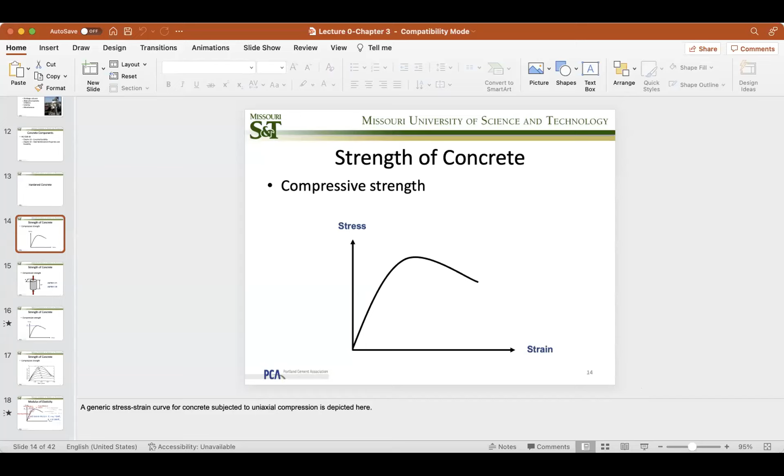Okay, now what we also learned, shoot, this is not open yet, sorry. What we learned from the concrete properties last time, 1 second, this thing is warming up, is that concrete has paste and aggregates. We know also what kind of test method we use to get compressive strength out of it. What do we use? Hydraulic, sure. But what kind of test samples? Cylinders, right? So which are the 2 cylinder sizes we use? 6x12, right? And 4x8.

Sorry, I don't like this stuff. Okay, so there we go. That's what we learned, okay? And we also said something about the modulus of elasticity, right? Modulus of elasticity. So I need to share screen apparently so we can get it recorded. So let me do that as well. There we go.

We have a nice nonlinear curve in terms of stress and strain. The definition of stress is pound per square inch, and the definition of strain is elongation over original length. So what is the unit for strain? No unit, right? So 1 is the unit. Now the modulus of elasticity, or Young's modulus, for concrete is defined as the slope of this linear curve, equal to stress divided by strain. Given that the unit for stress is PSI, what is your unit for the modulus of elasticity? PSI. All right, good. That's what we learned.

All right, so next stuff. We now know we have to test the concrete cylinders. And there are standards, right? 25 tamps per layer, 3 layers for 6x12. Similar things go for 4x8, might be a little bit different, but that's how we prepare cylinders. We prepare cylinders according to ASTM standards C31 and C39. If you have doubts and worries, go to those and find out the details.

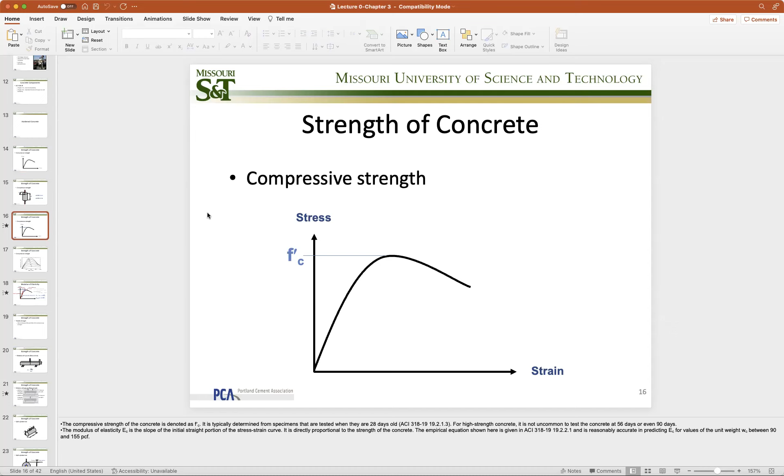Now, next step, compressive strength of concrete. We call the peak stress of the stress-strain curve f'c the compressive strength of the concrete. And everything, meaning the modulus of elasticity and the tensile strength, is related to this f'c. So all we need to do is get f'c and estimate the other properties for concrete.

Okay, you need to know this. As concrete strength goes up, the stress-strain relationship of the concrete changes. You see this curve was originally flat, now becomes a little bit sharp, meaning the strength increases, but the failure strain or ductility reduces.

This is the nature of law for materials. Any material that is high strength is usually brittle. Any material that is low strength is usually tough and ductile. Give me an example: concrete is high strength, brittle. What's the other material that is low strength but ductile? Rubber, right? Tires on your cars. That's the example. So similarly for concrete, the higher strength you go, the more brittle it is.

So what does this imply in terms of design? If I have high strength concrete compared to low strength concrete, what do I need to do to ensure it is safe? Increase ductility. What should I do? Add steel reinforcement.

Got it? So for UHPC, what is UHPC? Ultra high strength concrete, right? You've seen that a lot for building structures and bridges out there. Why do we use UHPC anyway? Why do we need high strength concrete? To reduce the section size so we can build slender structures.

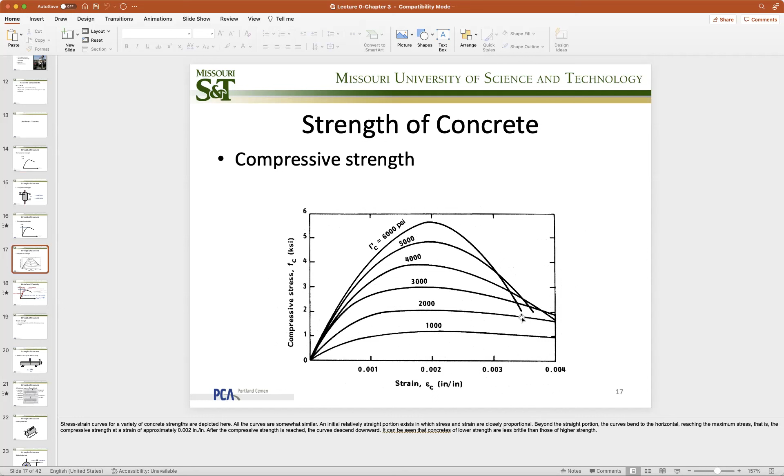But the sacrifice is what? We need to add a lot of steel. Okay, so that's the original concept coming from this curve. And now we have a lot of delicate parts of this thing, like the initial tangent modulus and B and A, all that crazy stuff. I will talk about it in terms of writing right after the slide. So for now, this is just for sightseeing purposes.

One thing you take away right now is EC here in terms of modulus of elasticity or Young's modulus. Young is a guy who discovered this thing, way ahead of Hooke. That is EC equal to 57,000 square root of F prime C.

Now F prime C is in terms of PSI. So what is the unit of square root of F prime C? Square root of PSI, isn't it? Wrong. This is an empirical equation, so there is no square root of PSI. You just take the number in terms of PSI but leave the unit out.

So modulus of elasticity shares the same unit as F prime C. Remember that. Now let me ask a question. I am on site, my guy told me the concrete is 4 KSI. What is my Young's modulus, my modulus of elasticity? Don't stare at me, do you want me to use Siri or pull out your calculator? Let's punch the numbers, pull out your calculators and do it.

57,000, and my concrete, F prime C, curbside concrete picked up from Rolla Ready Mix, is 4 KSI. What do I have for EC? Come on, you have the equation: 57,000 square root of F prime C. What do you have? I'm considering giving a bonus to whoever shouts out the correct answer first.

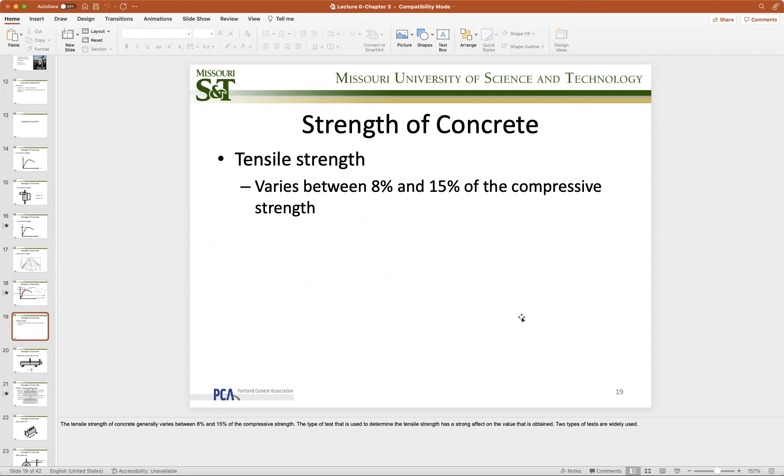Okay, so 6M over BH squared, and you get the tensile strength of the concrete. Let me ask you this again. The crack will start from the top or the crack will start from the bottom? Bottom. Why is that? Because that's where the tensile stress, tension, is at. Great, okay, that's it.

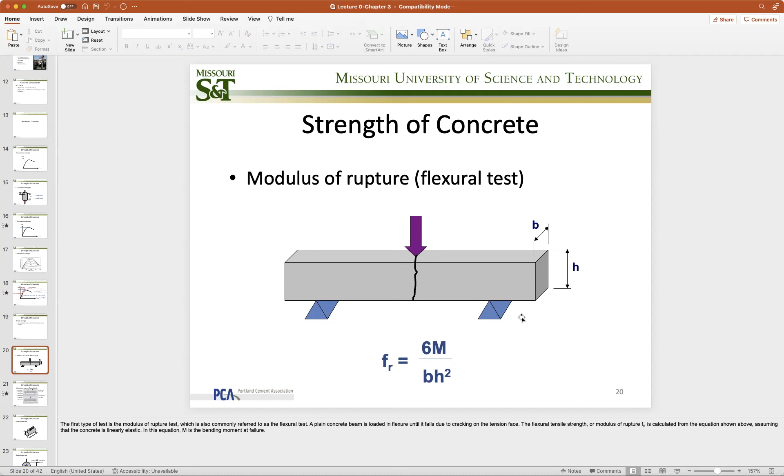So there are other ways. We also do 4-point load instead of 3-point load. And why we're doing 4-point load? Well, because the moment is different, right? So for the 3-point load, what does the moment diagram look like in your head? Hint, triangle or rectangle? Triangle, right? So that means I only have one spot that has a maximum moment, which is the middle of the beam. Is that right? Okay. For 4-point load, you will have a so-called constant moment zone. That means in the middle section, the entire zone has the same moment.

So answer me this. You do a test, one with 3-point load, one with 4-point load. Which one gives you a lower number? Let me ask you again, gentlemen, that is not on your phone. You have a 3-point load and a 4-point load, and you do 2 tests, same beam, identical. Now, which number is lower, from the 4-point test or the 3-point load test? Why? Because there's a higher moment in the middle... let's assume it's the same moment. That's a good answer, so my fault. Let's assume same moment though. It's more concentrated, so one part has to experience it.

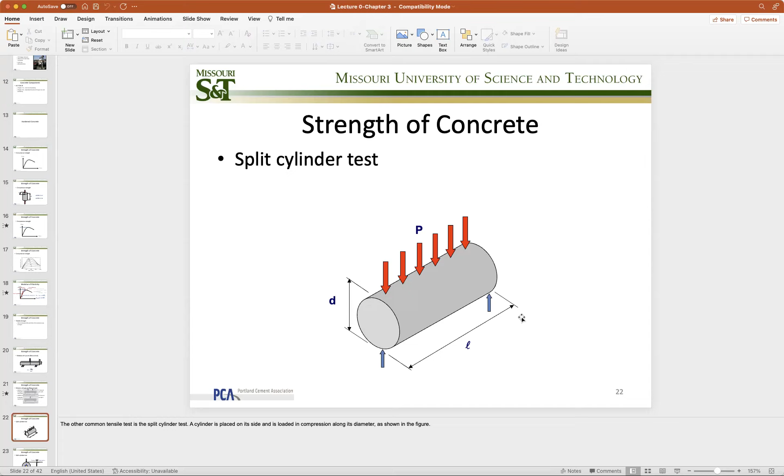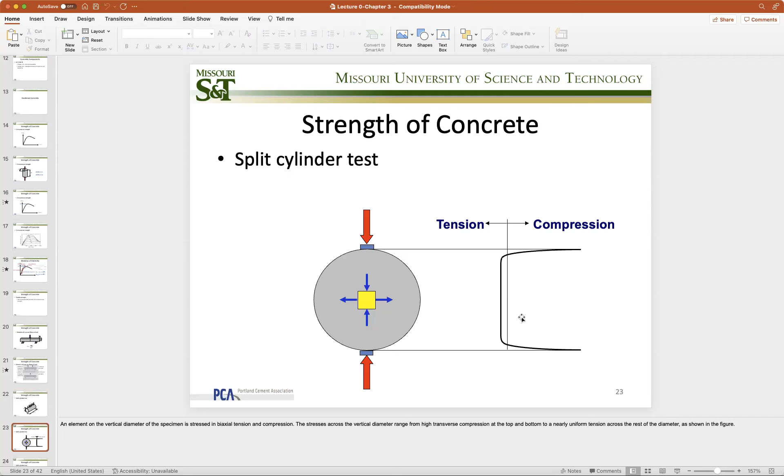It all depends on stress distribution. For split cylinder, you have a tensile zone, but you also have some compressive zone on the top. So the chance of failure is actually a little bit higher for the split cylinder, so split cylinder will give you a lower stress. That's what we learned.

Now compare the three tests before we go on, I want you to write some numbers down. For the beam, the obtained tensile strength is usually called modulus of rupture, MOR. Write it down. That number is represented by a symbol F with a subscript R, lowercase r.

And that equals 7.5 square root of F prime C, with F prime C taken as PSI. That's from the beam bending experiment. For split cylinder, usually it is 6.4 square root of F prime C, an empirical estimation.

So which number is lower for the same concrete strength? Split cylinder. Remember that, I will ask you that in the exam. But we usually don't use the split cylinder test results for design. We use 7.5 square root F prime C for design purposes, and that usually equals about 10% of concrete compressive strength.

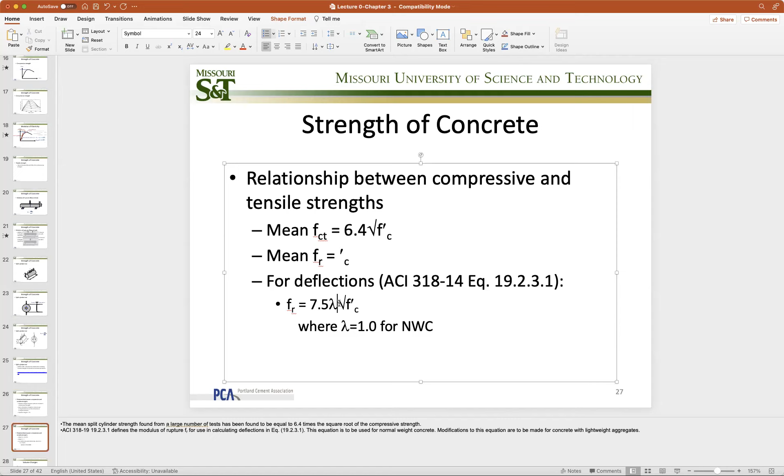All right, so that's the idea. Quickly, I want to get through this stuff. Concrete will change its volume. It will shrink, it will creep, and it will expand under temperature.

What is the shrinkage? What causes it to shrink? Well, it naturally likes to shrink. So what component has to be taken off to reduce its volume? What's in it? Water, right? Water is the only thing that evaporates and will shrink the concrete.

What kind of problem do you anticipate if shrinkage happens? Cracking. Why is that? Because when you reduce your volume but your boundary is still fixing it, you are generating what? Tensile stress inside your concrete, so you crack. Okay, so that's called autogenous cracking. Autogenous cracking. Okay, all right.

So creep. What does creep mean? Creep means if my wife is cooking, I don't want her to know because I don't want to do extra work. I follow her from the kitchen to wherever she's going, and she just didn't realize. That means you're creepy, Bob. But that's not the same creep we're talking about here.

Creep, by definition, is a permanent deformation caused by permanent load. That means if I become a Shaolin monk, apply my palm on my table, right? The Pai Mei palm. Watch Kill Bill. Not much? Oh boy, you guys lost out.

Anyway, so I apply 100 pounds of force, right? Apply it for a second, nothing will happen. I sit on it for 100 years, right? Oh, I'd be bones then, right? But after 100 years of load, you will see a palm shape in the table. That means creep. It's not much load, but it's permanent. Forever. Okay, so that is the same as footing foundation settlement.

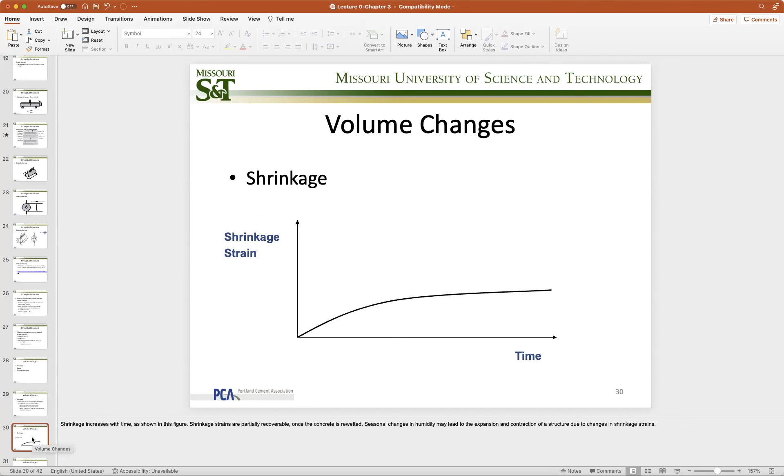Now, what does it mean? You guys taking the survey class, you take out equipment from somewhere down in the hall in the BCH, right? Next time when you take out equipment, look up, there's a giant crack there. And that is caused by creep. And don't tell the professor I said that, okay? It's supposed to be a secret.

All right, so that's what you need to know about concrete for design purposes. A lot of visuals, a lot of quick ideas. You need to remember all this for your exam, but I don't have to read it. I think you can comprehend and remember this, okay?

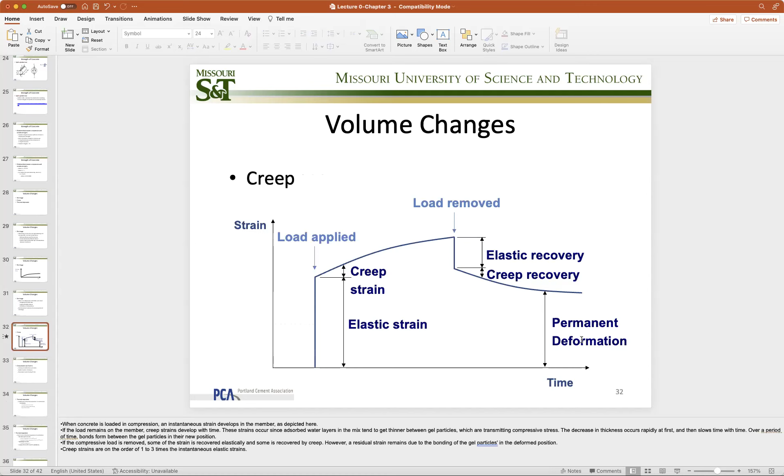Now, critical things, steel. For reinforcing steel, how many of you guys have worked with reinforcement before? One guy, two guys, okay. How many guys actually bend the stirrups yourself? No? Am I the only guy here who bends stirrups? All right, so I am the only guy. Okay, great. So you've seen the reinforcement, right?

Is it smooth? Is it smooth, shining like a mirror? No, right? It is usually what? Deformed, ribbed, right? What is that ribbing for? Surface area for what? For friction, for better bonding with the concrete. Interaction, friction, adhesion with the concrete.

So every reinforcement you see out there, unless it's wire mesh, is deformed. Hence, we call it rebar. That's the concept of it. So normal reinforcement we call deformed bar or rebar. We have welded wire reinforcement, usually for thin slabs and walls. We have prestressing steel, which we talk about in the prestressed concrete class, but this is for rebar. There are ASTM standards A615, A706.

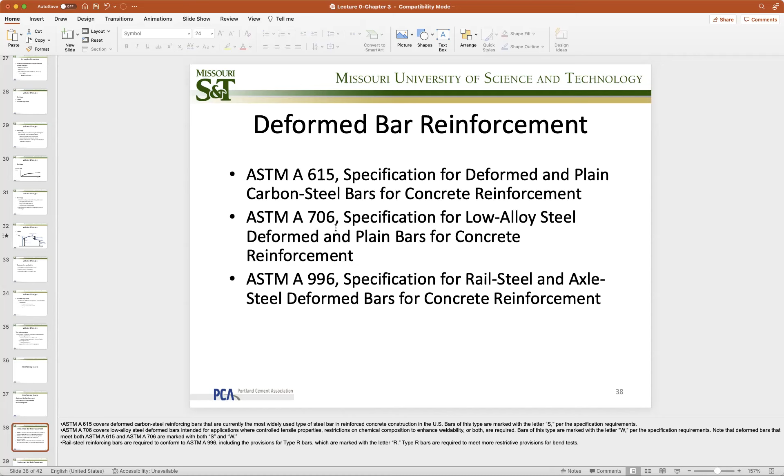Why is that? We have cold-formed structures, right? You will be taking lessons on cold-formed structures later in your life. Hopefully Dr. LaBoube is teaching it, I don't know whether he's still teaching that or not, but what is the difference between cold-drawn or cold-formed steel and hot rolled steel?

Temperature, sure, but in terms of mechanical properties, what are the differences? Ductility, and well, that's right. What else? So have you taken the materials lab before, tested steel before? No? Okay, so next time we do that, right?

You put a hot rolled steel and you put a cold formed steel, right? One behaves like a nice smooth line, which means no yielding point. That is cold formed. Hot rolled steel has a yielding point, and this is the yielding point I'm talking about. Why is that? Because hot rolled steel goes through a rapid annealing process. What is an annealing process? You bring it up to a very high temperature and quickly cool it down.

How many guys are into the forging TV shows on Netflix, Forged in Fire, something like that, right? There's always a critical step: anneal your knife, quench it, right? What is quenching? You bring it to a very high temperature, you quickly lower the temperature, where the grain in the steel crystallizes, becomes finer, so becomes stronger, right? So then you have the sharp point, it's called the yielding point.

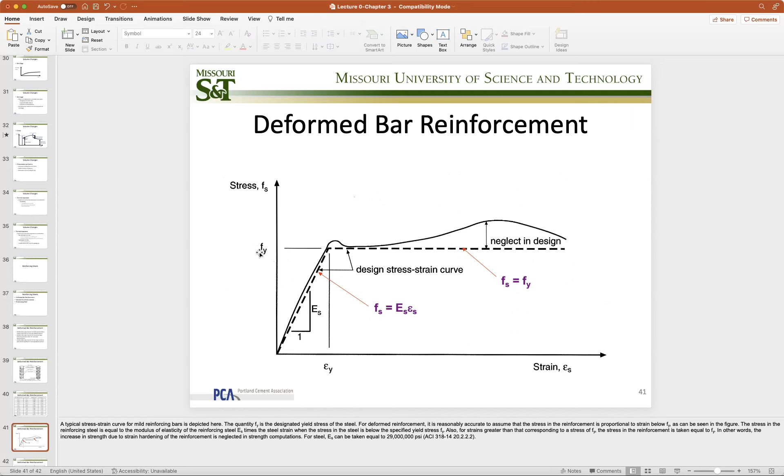Now, you hear them on the job site: Joe, what steel are you using? 40? 60? So they shout out 40, 60. What does it mean? It's grade, right? Grade 40, grade 60. 40 means 40 KSI for the yield strength fy. 60 means 60 KSI for the yield strength fy. Why is that so important? Because you need that number for your design.

Now, the structural steel you see in the lab or in buildings is usually 50. For stirrups, for shear, usually 40. For main reinforcement rebars in bridges and everything, usually 60. For the World Trade Center, high-rise buildings, usually they go with 75.

Okay, you want to sound like a pro, you need to know these numbers. All right, so that's it for these numbers. That is how much we need to know about steel. Is it the last slide? Almost the last slide. One more thing: bar size.

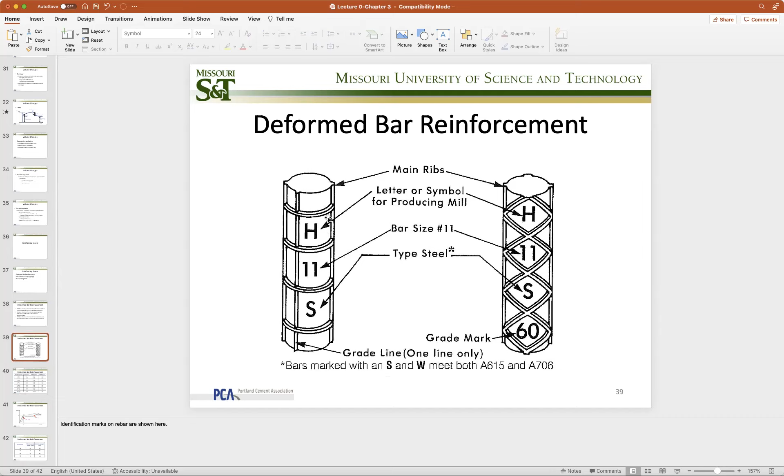You say, Bob, that's a lot of memory. My computer does that, not me. That's fine. There are critical numbers you need to remember. Number 3, mark them down, 0.11 inch squared. You will use this again, especially in the shear part, chapter 6 or 7. Number 3, 0.11. Number 4, 0.2 inch squared.

Then number 6, 0.44 inch squared. Number 8, 0.79 inch squared. And my personal favorite, number 9, 1 inch squared. Why is it my personal favorite? When I give you the exam, I need to put bars there. I'm lazy. I don't want to do fractions. So for four number 9 bars, how much total steel area do I have in the cross section? 4 inch squared. That's why it's my personal favorite. It will become your personal favorite as well because you do exams. Remember that.

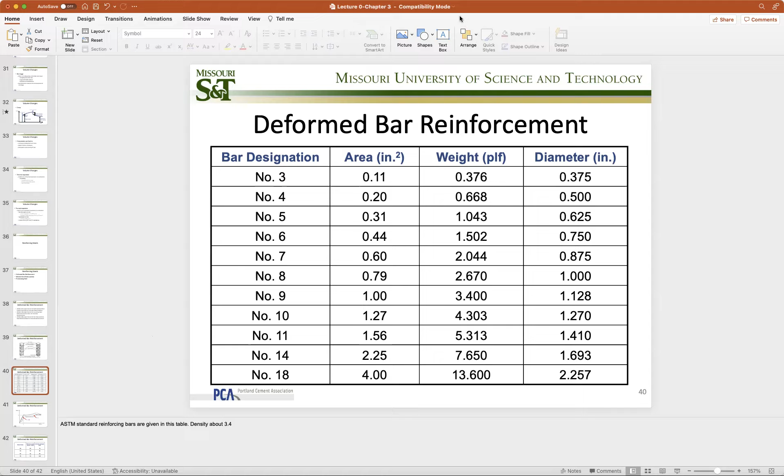All right, so that's about it. Now we flew through the concrete properties and steel properties in a jiffy. Should we go home now? No, I'm sorry. Hell starts now. Let's get into the mathematical side of it, which is my true favorite. Let's take a look at the equations and all the beautiful things that we will have.

Let me share my screen. This can be a little bit time consuming since I'm juggling three technologies at the same time. For old me, this is really hard, so have a little patience. Trying to make it large. If it's too small, just shout and I'll make it bigger. So open up this slide here.

Like I said, hell starts from now. Lecture 1, basic properties for design. Please pull out your notepads, iPads, Surface Pro, whatever you have. Let's start. Basic properties for design.

Okay, all right. So we talk about concrete properties, right? So let's say compressive strength of concrete, okay? We have talked about it. And that's a lot of information, right? So you will need to know these following for the exam, okay? So first thing, F prime C is the compressive strength of the concrete, but that is a 28-day strength using this fellow here, cylinder compressive test, okay? The term is uniaxial compressive test. Okay, uniaxial compressive test.

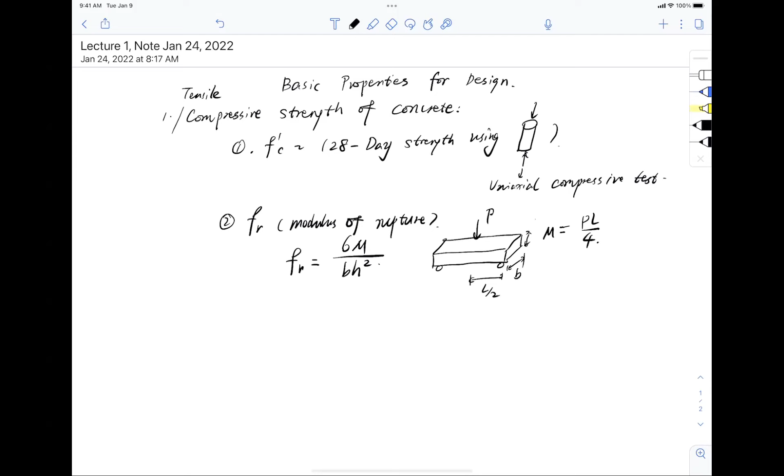Okay, good. So that is for the compressive strength. Now, let me just add this one, compressive, tensile. Sorry about that, tensile or compressive. Okay, another thing, FR, we call it modulus of rupture, right? Modulus of rupture. And that is FR equals 6M over BH squared. In your head, it should be a small, tiny beam here. And you can draw that on your crib sheet, supported at 2 ends, with a force there at half L. So M equals PL over 4, okay? And then B is the width of the section. H is the height of the section. Should not make mistakes. That's how you calculate the strength from the test.

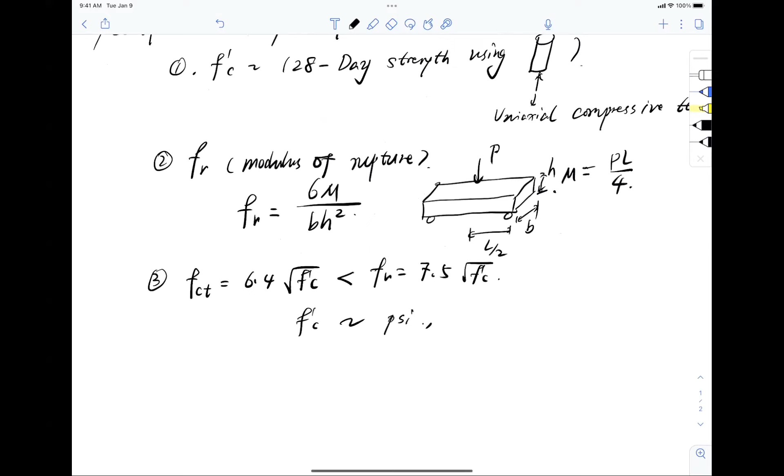Now, the third thing, FCR or FCT roughly equal to 6.4 square root F prime C, smaller than FR equal to 7.5 square root F prime C. And knowing that F prime C is in terms of PSI, okay? In terms of PSI, no KSI here. So you see, that's all you need to know for the exam, for concrete properties.

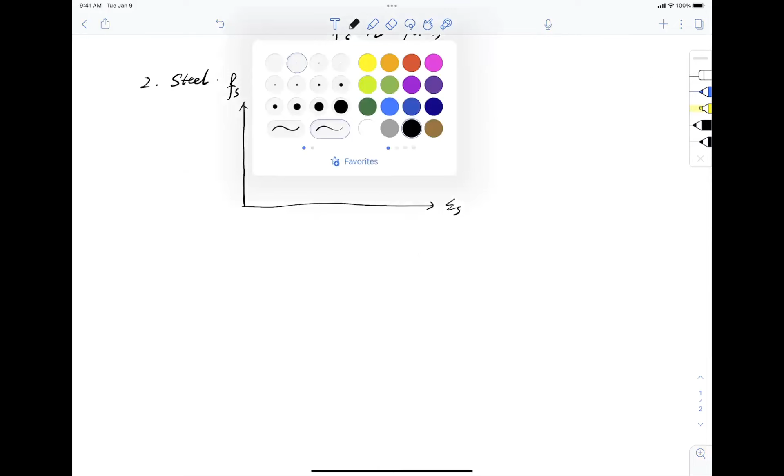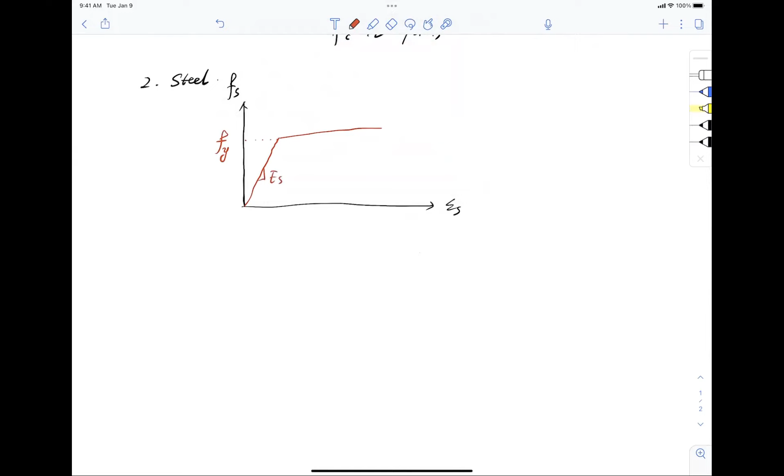Now steel, okay? For steel. In terms of steel, we call the stress in the steel Fs, and the strain in the steel epsilon S. And if I want to draw a curve, it goes like this, linear line, elastoplastic, the horizontal flattens out. And this value here, we call it Fy, Y representing yield, so-called yield strength. And this slope here is called modulus of elasticity for steel. And ladies and gentlemen, this number you will need to remember is 29,000 KSI. What is the modulus of elasticity for steel? 29,000 KSI, great.

Why do you need to remember this? Because in the exam, I will not be giving you that. You need to remember this. Why, Bob? Why make my life harder? It's not me, okay? It's the society, blame them, right? Because on the job site, nobody will give you a book. These numbers you need to remember. All right, so that is 29,000 KSI, great.

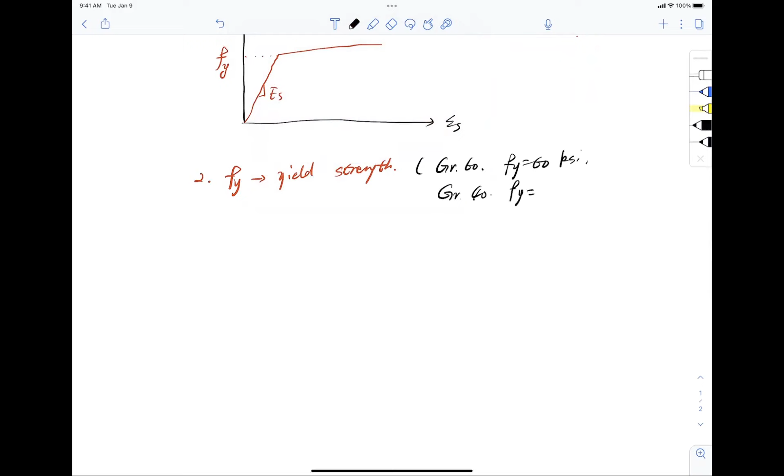We need to know Fy is so-called yield strength. And we also need to know that it depends on the grade. If it's grade 60, Fy equals 60 KSI. If it's grade 40, what is Fy, folks? Come on, 40 KSI. Again, I will not tell you in the exam what the yield strength for the steel is. I simply will say grade 40, grade 60, and go figure. Remember that. All right, so last thing, bar size. For a number 5 bar, what is the size of the bar, folks?

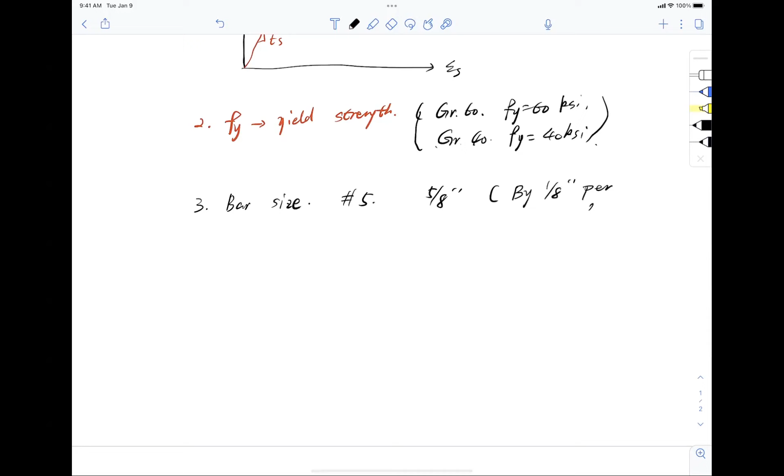5/8, right? So go by 1/8 of an inch per increment. Okay, need to know that. All right. And my personal favorite, number 9. That is 1 inch of bar diameter. What is the cross-sectional area of a number 9 bar?

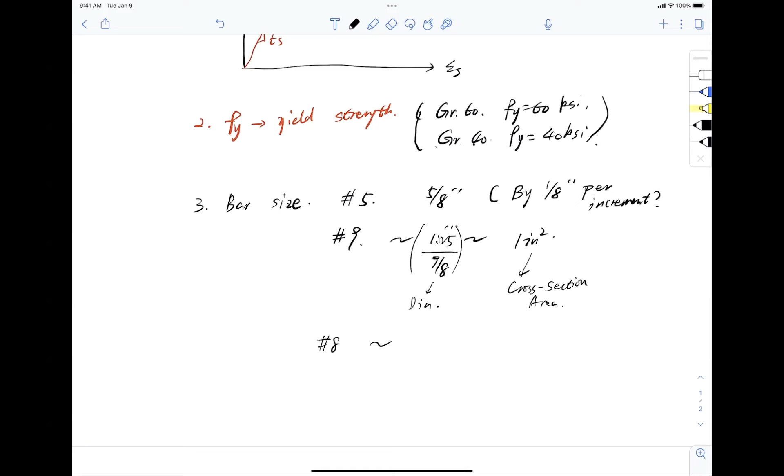Did I make a mistake here? You bet. Is that 1.125? Yeah, that is the diameter of number 9 bar, right? Because that is 9/8. And area is 1 inch squared. I made a mistake just now, and trust me, likely you'll make the same mistake, okay? Number 9 bar, the diameter is this, and this is the cross-sectional area. Don't get confused. So number 8 bar, what is the diameter for number 8 bar? 1 inch, okay? You guys can get confused.

So let me rewrite this. Should be 9/8 in terms of diameter for number 9. For number 8, it's got to be 1 inch in diameter. And what is the cross-sectional area for number 8 bar? 0.79, if you remember that number. You have to remember these, okay? Number 8, number 9.

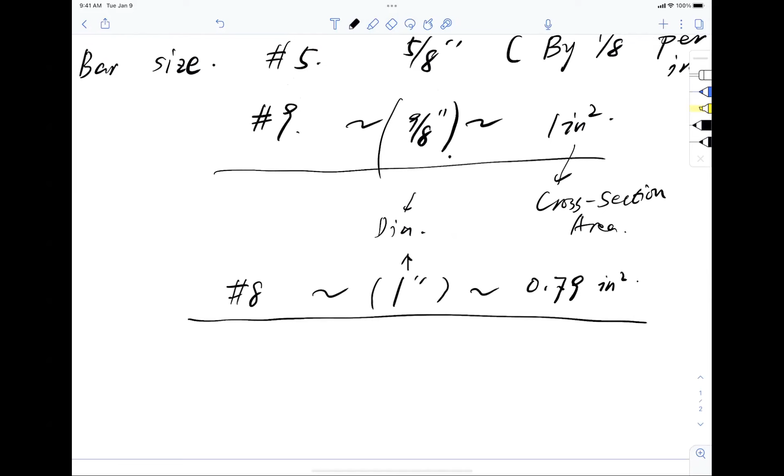While we're at it, number 4, what is the diameter of number 4? 1/2 inch, right? Or 4/8. What is the area for number 4? 0.2 inch squared. Now, number 3, the diameter of number 3 is 3/8, right? So 0.375 inch. Area 0.11 inch squared. Remember this, okay?

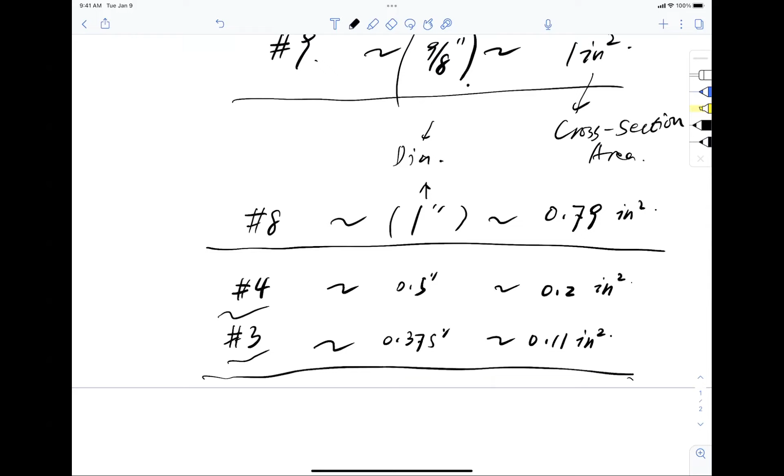It's okay if you want to put it on a cheat sheet, but you need to remember this to be fast in the exam. We usually have a very long exam, so fast is the key. Speed is the key. All right, clear. Not so bad, is it?

So before we move on, we talked about live load and dead load. You will have homework today, so let me give you a quick example to help you. Say I have a beam like this. Let's put the numbers in here. The beam has a span length of 20 feet. I have a dead load, PD, equal to 8 kips, right in the middle of the beam.

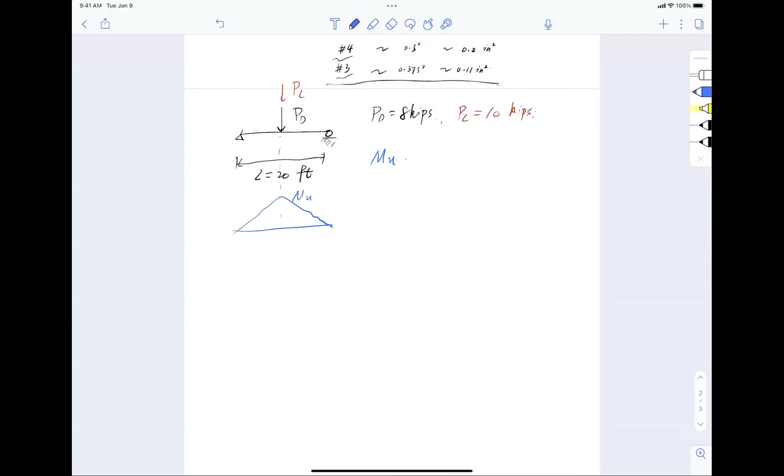And I have a live load here, let me use a different color, PL, on top of the PD. And that PL is 10 kips. So my question is, what is MU at the middle span? I draw my moment diagram. I want to find out my MU at the middle span. So what is my MU? How do we get this MU?

First, what is MU? I don't know, Bob. My farm, we have cows. They do, that's MU, isn't it? Yeah, sure, that is MU.

But what does U represent? Ultimate, right? What does ultimate mean? Ultimate means 1.2 what? 1.2 that, right? Plus what? There you go. So that's how we do it: 1.2, 1.6. Now, what is MD? Dead load moment. Point load configuration, mid-span moment, PL over 4. Remember that? So what is it?

Come on, 8 kips, L 20 feet, divided by 4, what do I get? 40 kip-foot. What is my live load moment? PL over 4. PL is 10 kips, length 20 feet, divided by 4. So what do I get? 50 kip-foot. Nice. And my total moment, MU, equals 1.2 dead, that is 1.2 times 40 kip-foot, plus 1.6 times 50 kip-foot.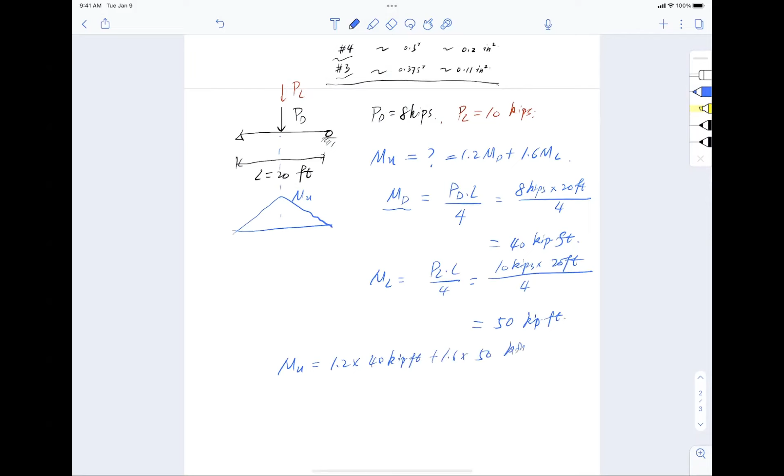So what do I have, folks? Come on, help me out here. I suck at mathematics. I admit it freely. So you will help me out. Don't stare at me or I'll call Siri up, right? Punch in the numbers, let me know what you have. Come on, folks. Louder.

128, great. That is the number I have. So that is how you calculate the ultimate load. This is applied load. This is the number you use for design. So quickly here, how do I design buildings? Need to have equations, right? So let me give you a hint.

Start with phi Mn, right? Not chi, epsilon, not pi, whatever Greek letter you've seen before. It's phi, okay? Phi. What is phi? What is phi?

Strength reduction factor. For a tension controlled member, what is the value for phi? 0.9, remember this. For shear, 0.75. What are we dealing with here, moment? And tension control, assuming tension control, so phi equals 0.9.

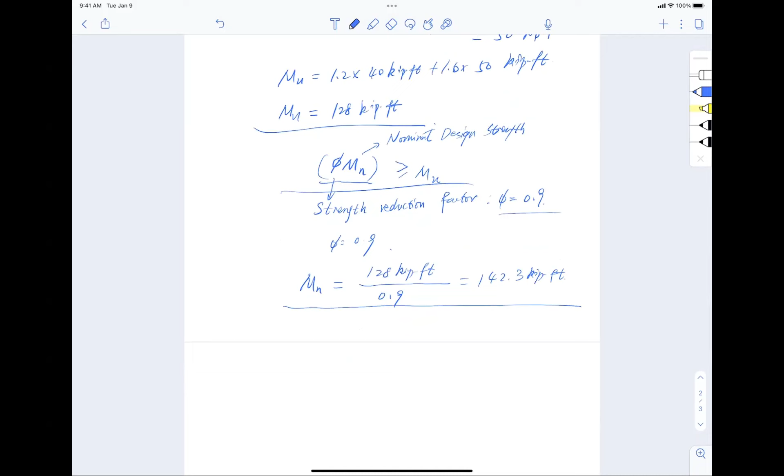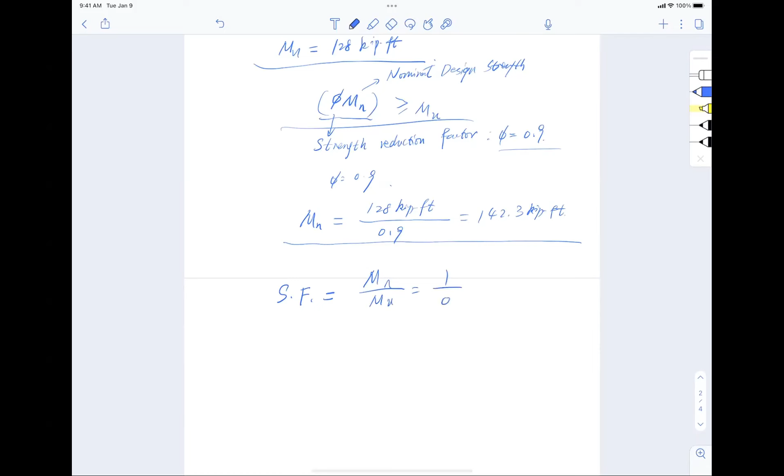Now if some cheeky fellow like Babu comes around and says, what is your safety factor? Safety factor, new concept, right? That is Mu divided by Mn, or Mn over Mu, sorry, flipped. Mn over Mu, that is 1 over phi, isn't it? So phi is 0.9. So what is my safety factor? 1.1, there you go.

What is the safety factor for steel? You guys learn that in steel structures? 1.5, 1.67. What is the safety factor for RC concrete, for bending, for flexure? 1.1. So who's safer? They are safer, isn't it? Okay, just some fun facts.

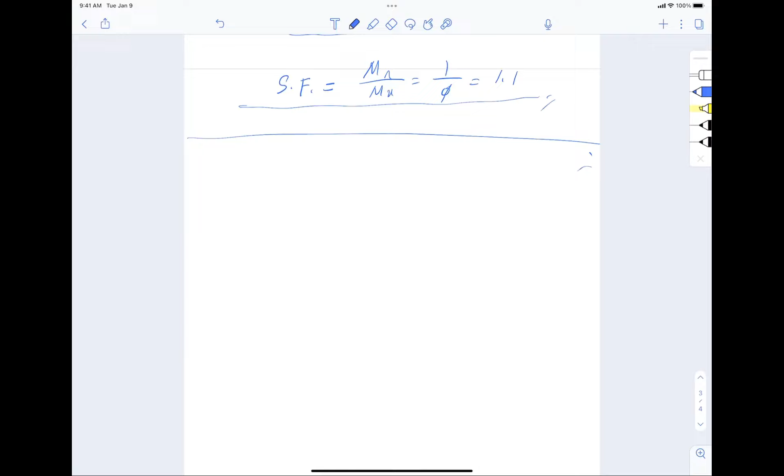Doing concrete testing this morning for Southeast wastewater treatment plant. We tested the air content first. What did you get for air content? 3.5. Oh, that's not too bad. Yeah, it's for exterior, so they added air entrainment. Yeah, we'll be going over the admixtures. I was going to say it's on the low side, but after we tested, it was like 5.8, so it jumped almost that much. It was interesting. But yeah, it's kind of cool to see how they relate from this class.

I'm actually ACI certified level 2. Oh really? I haven't gotten a certification yet. They haven't done that for me because they didn't want to invest the time since I'm an intern. But try to get it, it bumps your pay. Yeah, I know, I do want to get it. It's just a tiny cost, but you have to go through some training, and you do that for asphalt tests as well. Asphalt probably gets you more. I didn't know if there's some kind of certification through school I could do.

Talk to Dr. Faze, he's in charge of the ACI chapter here, I think they might get you a discount or something. For me it was $95, but they sent me for a course. They usually don't have undergrad students doing the certification, most of them are old technicians with no college education. I went there mostly for the free barbecues.

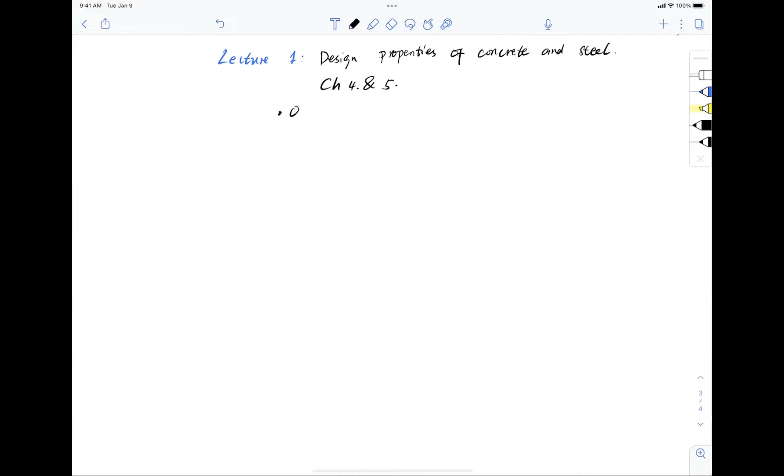Now keep in mind, these are not real behavior, but more like a simplified behavior for design. You can find this from your textbook, chapter 4, chapter 5. Objective is that we need to understand objective 1, that is understand the concept of flexure design. For this part, I think for today we will get mainly into the cracking moment, and maybe a little bit compressive zone. We'll see how that goes with the time.

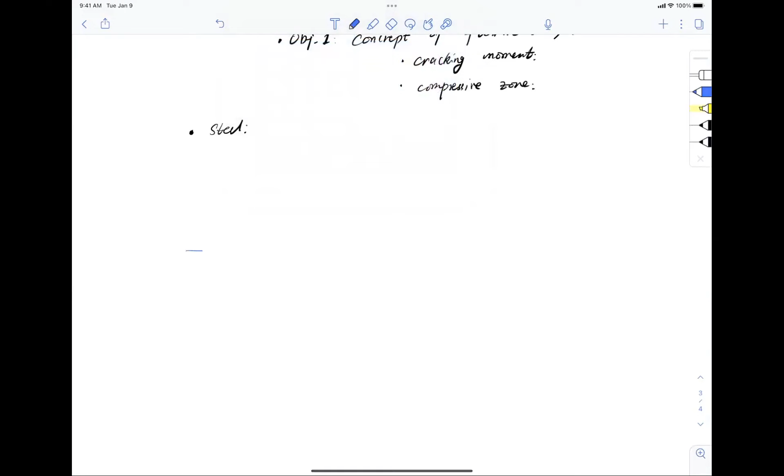So first, steel. Now we said steel looks like a nice simplified two-stage behavior. If I call this Fs and I call this epsilon S, it should go like a linear curve beginning and then flatten out. And you have a yield strength called Fy. The other way is in compression, and let's say compression is positive and the other way is negative in tension.

Now let me ask you this: if the yield strength for steel is Fy equal to 60 KSI, what is the compressive strength of that steel? Steel, right, not concrete, steel. If the yield strength of grade 60 steel is 60 KSI, what is the compressive strength? 60 KSI, right? What is the tensile strength? 60 KSI. Okay, so steel is a so-called symmetric material, symmetric in terms of compression and tension, meaning it behaves the same if it's in tension or in compression.

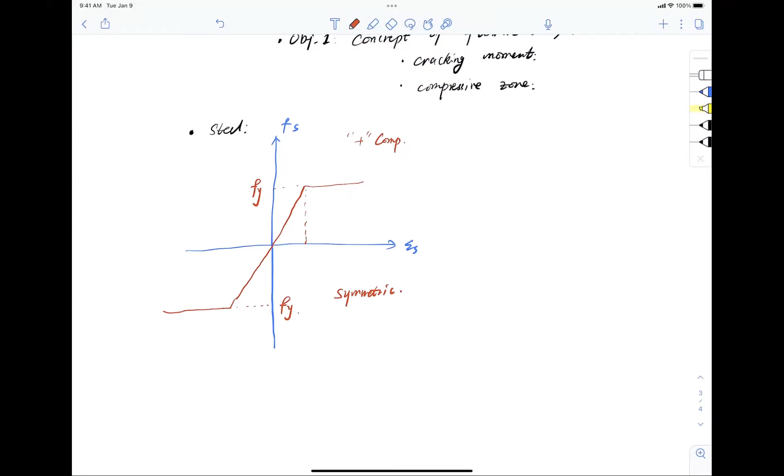0.00207, and this is for grade 60. Now how do I get that number? I get that number because this is Young's modulus, the slope of this linear response. So Young's modulus for steel is what? 29,000 KSI, right? So for grade 60, I have yield strain epsilon Y equal to Fy divided by ES. Fy is 60 KSI and ES is 29,000 KSI. Units cancel, KSI, left you with 0.00207, and that is the yield strain of the steel for grade 60.

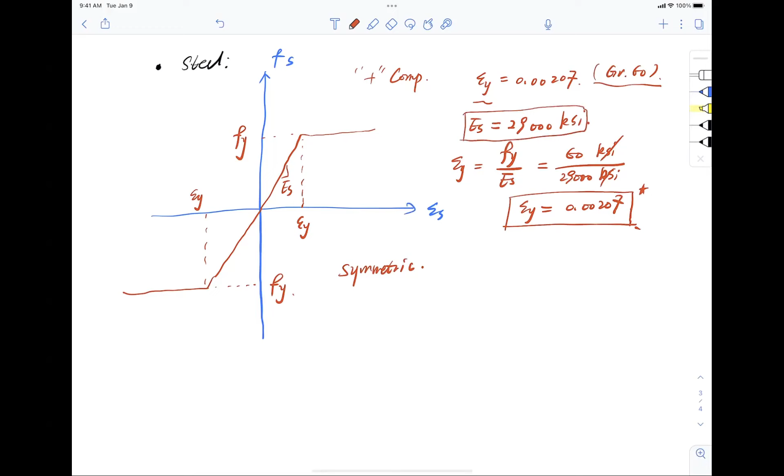For grade 60, so box it up, star it. You will need to remember this. Same thing here, need to remember this. So yield strain is constant for the same grade, get it, grade 60 always 0.00207. And we actually use this number in design a lot, so need to remember that.

Okay, so that is it for steel. So three things: Young's modulus for steel, 29,000 KSI; yield strain 0.00207 for grade 60, always grade 60; and symmetric materials, meaning it behaves the same in tension and compression.

Now why is that? My personal feeling is steel is not good for compression. Remember, concrete is good for compression, right? Why is that? Because when you think about the Eiffel Tower, steel structures, what do you feel, is it heavy or light? You feel light, you feel it's light. Why? Because it's empty, right, it's lattice structures, a lot of holes opening in it. So steel structures are actually very heavy, so we make them like lattice truss, meaning spatial, rod members, like slenderness, like my pen, isn't it? That's how we usually make steel. So what happens if I start to compress the pen? It will deform and then get outside this plane, called buckle.

That buckling load is much lower than the yield strength of the steel. Most likely your steel will fail in terms of buckling, not in terms of yielding. Only in tension does your steel fail in yielding. That is the reason why steel is not good for compression.

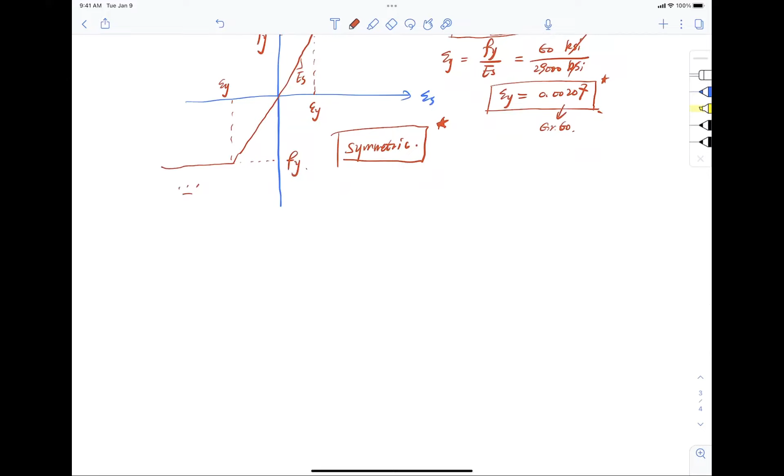Now concrete. We have talked about F prime C and everything, but literally the stress strain curve for concrete looks like this. In compression again, assume it's positive.

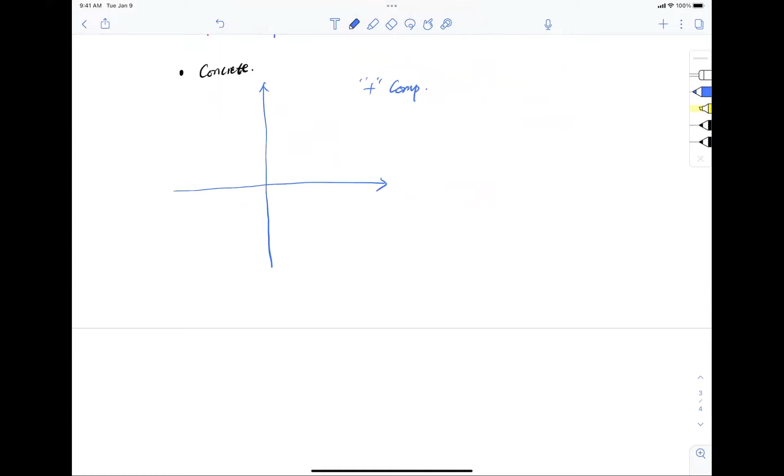In compression, the curve shows a linear behavior at first, then goes into the hardening stage and then softening stage. At the peak, it has a strength called F prime C - that is the compressive strength. Corresponding to that strength, we have a peak strain, epsilon 0.

But nobody cares about epsilon 0 for concrete. We labeled it, but nobody cares about the value. Everybody cares about this value though, the failure point - we call it epsilon Cu, compressive failure for concrete. Everybody cares about this because that's the maximum strain a concrete can sustain.

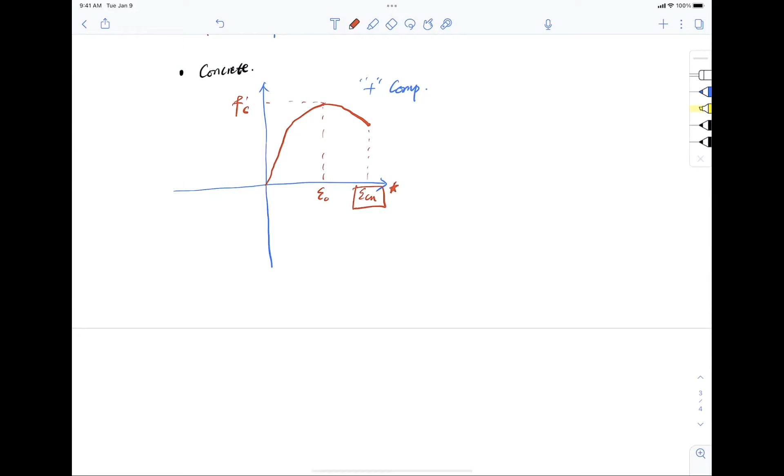That value, epsilon Cu, you need to remember this: 0.003. That number you need to remember. What's the subscript on that? Epsilon Cu, like copper - CU, compressive at ultimate. Remember this.

Now Young's modulus of concrete, EC, equals 57,000 times the square root of F prime C. Need to remember this equation. And again, F prime C in terms of unit is PSI.

Now, one funny concept: if I stack or compare the steel against concrete, which means I use ES, Young's modulus of steel - again what is that number? 29,000 KSI, I will drill you to death but you will remember this number - over EC, that is 57,000 square root F prime C. Let's say this F prime C is 5,000 PSI. Then what do I have? 29,000 KSI divided by what?

Come on, calculators, help me out here. What is EC for a 5,000 PSI concrete? 57,000 square root of 5,000 in terms of PSI - what is it? Let's get an exact number: 4,030,509. Is that what you get? Let's go easy on me. Still not good at English.

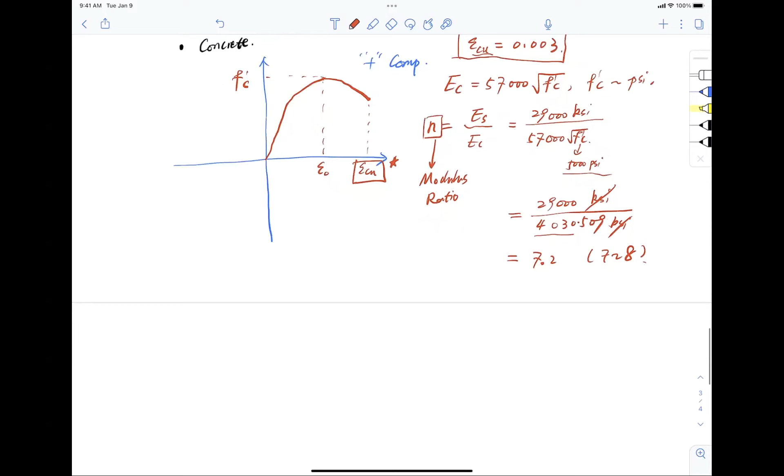So who is the more badass here, steel or concrete? Steel is, actually. So why are we not using steel for compression? Because it buckles, and it's actually expensive and heavy. That's the sole reason we're using concrete here. We will use this later in the game, but right now just need to remember this. All right, so this is about compression of the concrete.

Compression of the concrete - now in tension, we keep going. Should I see the same thing in tension? Should I assume concrete is symmetric?

No, right? Why is that? Because it will fracture, right? It will crack, right? And at what strength will it crack? F modulus of rupture is what? FR, isn't it? FR, where you at it? 7.5 lambda what? Square root of what? F prime C. Okay. Where you at it for 5,000 PSI for normal weight concrete, that is what? 530 PSI. Okay. 530 PSI for F prime C 5,000 PSI. Okay.

You remember this number? Exam, you're gonna go very fast. Okay. You don't remember, you have to punch your calculator like your keyboard when you play Call of Duty, right? So don't do that. Okay. You don't want that. All right.

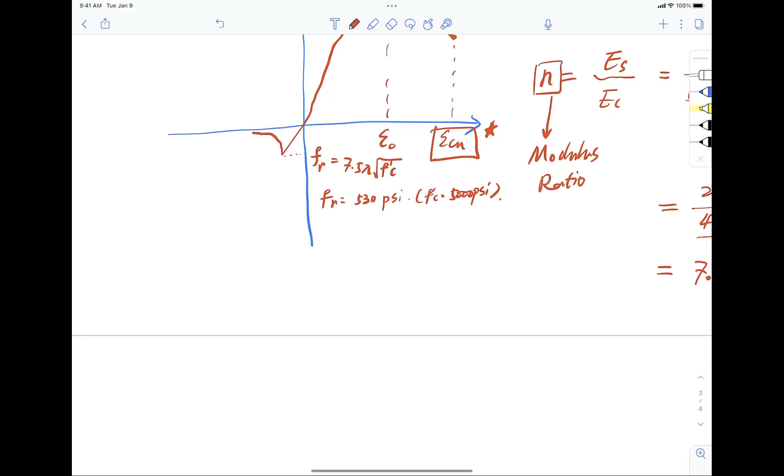So it's linear till you hit peak strength and you break, right? And then you see quickly a softening stage, just like that. So this means what? Concrete is a so-called non-symmetric or unsymmetric material. Okay, it is not symmetric, meaning the compressive behavior of concrete is different from the tensile behavior of concrete. Got it? The compressive behavior of the concrete is different from the tensile behavior of the concrete.

Now, the compressive behavior of steel is the same as the tensile behavior of the steel. Okay, so they're different. Got it? All right, very important. We will have that in the exam. We'll have that in the exam. Okay, unsymmetric. All right, so you see, these are the number games.

Okay, so what do we need to remember? We need to remember this guy. Okay, and we remember this guy, right? The epsilon CU, right? And we remember, of course, this modulus ratio, but you won't need it right now. But most important thing, we need to remember this fellow here, okay? Tensile strength, tensile strength.

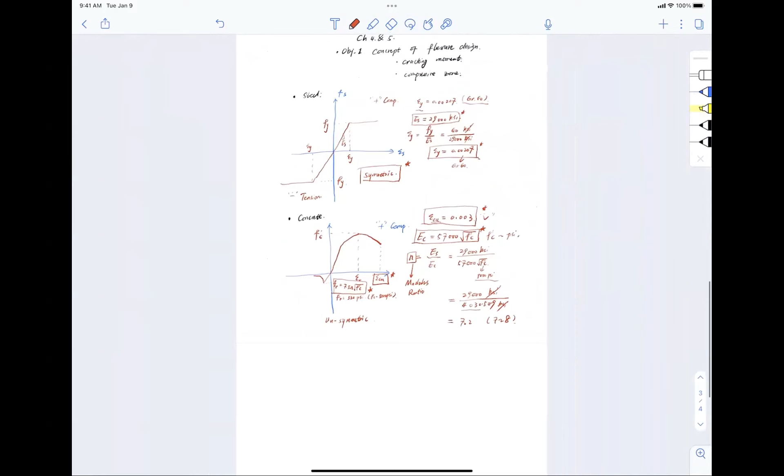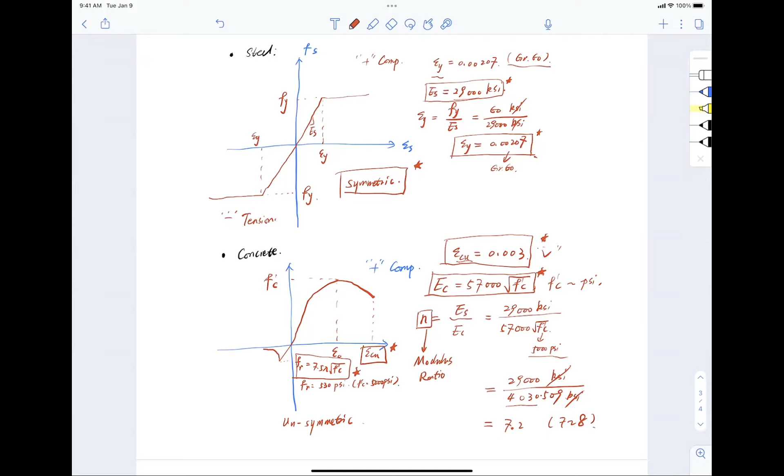All right, so that's as far as we need to worry about the properties of steel and concrete. If I were you, I would take a snapshot of this and print it as a cheat sheet on your big paper, front and back, letter size for the first exam, okay? I'll do that just for the sake of it, simple, okay? All right, so that's it.

Now, we need to talk about the bending. Okay, talk about the bending. So now we know how concrete behaves, right? And I start building concrete structures, right? Imagine I'm a caveman, right? Caveman. I just like to play with mud, right? I just put the concrete together. No reinforcement in my head. Pure concrete. I love concrete, right? I have a beam like this. Let me change the color and say that this is to study cracking moment, okay? Study cracking moment.

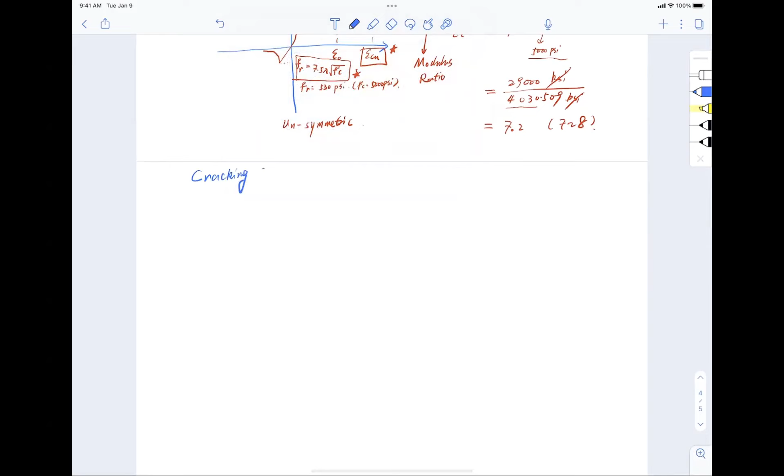I build a beam like this, nice long beam, okay? And I say, look, I am bending it, okay? And never you mind, is it a 4-point bend, 3-point bend, but something like this, maybe let's say 3-point bend, I exert some bending moment to my beam, and I have a length of it, and let's call it L. And the total force, you know, is P, and I want to bend it, right?

So first things first, where will my crack start from, bottom or top? Bottom or top? Bottom, right? So that's where my crack's gonna start, okay? When will my crack start? When? Well, Bob, I don't know. You tell me. Well, I don't know either, right? So, but let's think about it. Why will concrete crack? Why is the concrete cracked?

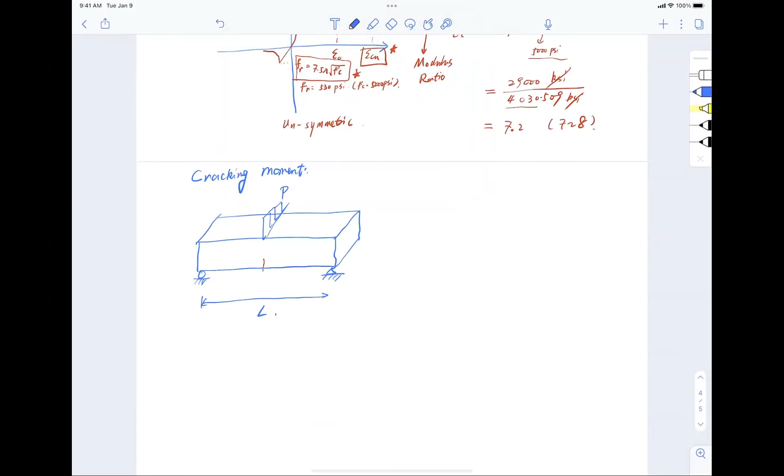So the tensile strength of the concrete here has been breached, basically, right? So the stress in the concrete reaches the tensile strength of the concrete, F modulus of rupture, Fr equal to what? 7.5 lambda square root of F prime C. So it is at this moment concrete cracks, right? Once concrete cracks, what happens? Your section becomes smaller because a cracked section doesn't have any strength at all, right? So the crack propagates all the way through your beam and you become two pieces, right? Like the Shaolin monk, right? One palm cut into two parts, right?

So to calculate the moment, we use the old friend moment calculation equation, MCR, I call it cracking moment. That should equal what? FR, which is the tensile strength, multiplied by IG, oh boy, moment of inertia, okay? Moment of inertia, divided by the distance between the neutral axis and the most stretched tensile fiber, in this case half of my height, which is YT, okay?

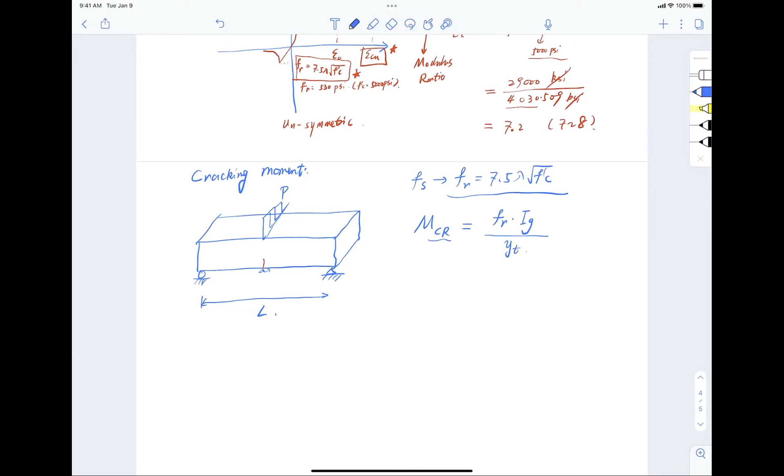Shocking, of course, because we forgot mechanics of materials, right? So let's review a little bit. How do I get this equation anyway? Remember, in mechanics of materials, we're looking at this section right here, remember? Okay, we say let's take the shaded section out. This section, let's just say it has a width of B, height of H. What is its moment of inertia, IG, for this section here?

1/12 BH cube. You took from Nick or me? I took it from there. Oh man, one for Nick and one for Bob. 1/12 BH cube, okay? That is for the moment of inertia.

Now, the tensile stress right here is FR, okay? Neutral axis for rectangular section is right in the middle. So the distance between the neutral axis to the tensile fiber is what? YT equal to what? Symmetric, so YT equal to H divided by 2.

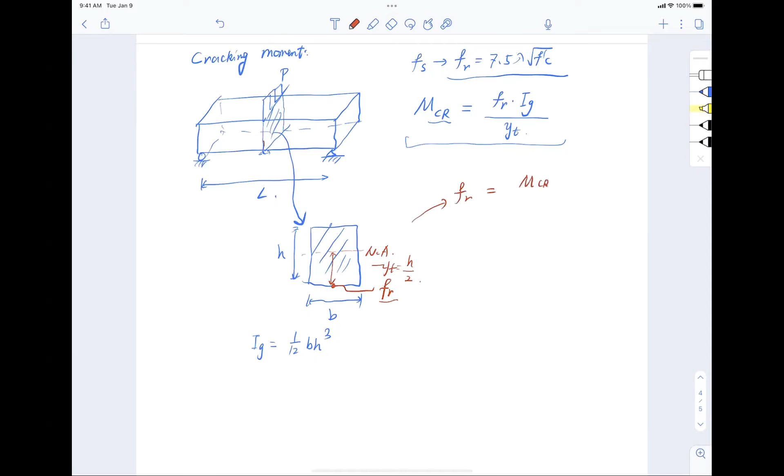Okay, so I want to find the stress, right? So FR from the review should equal to moment MCR multiplied by distance YT divided by IG, which is moment of inertia. So that's how I get this equation, right? Just flip around. You guys see it now? Remember this? Mechanics of materials? Okay, so that's how I get it.

Now, since most of the beams we're dealing with here are usually rectangular, BH, let me simplify even more. So now I got this equation, right? I say MCR equal to FR. What is FR anyway in English? Modulus of rupture, right? I mean, mathematically, 7.5.

Did I wake you up? Yeah, I should. There you go. Sorry, no offense, okay? I'm just making jokes for you guys to wake up, okay?

7.5 square root of f'c, right? That is FR. Now, what is my IG? 1 over 12 BH cube, and that is on the top. What is on the bottom? YT. What is YT here? H divided by 2. So I can simplify that. So MCR essentially equal to 7.5 square root of f'c times BH squared over 6. Got it? See it, guys?

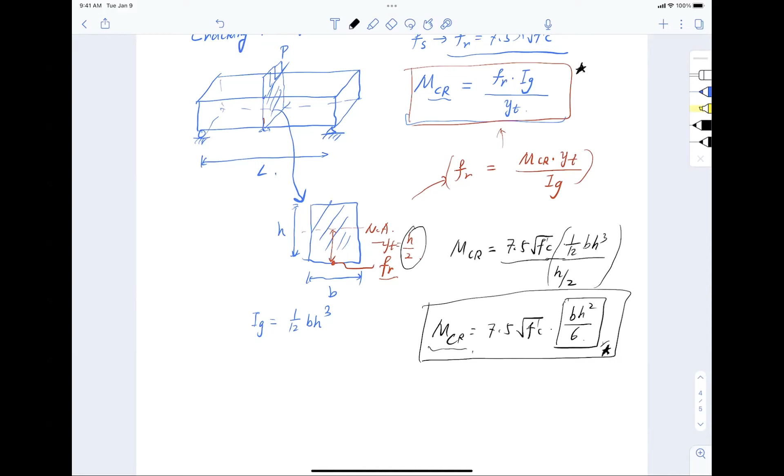So what do you use it for? I don't know. We have the cracking moment. That's it. So what do you use it for? When will a concrete beam crack? When you're on the job site, when you use the crane to lift it up to assemble it, especially for precast, isn't it? So on the crane, what do you see? Oh, I don't know, Bob. I'll give you a scenario, right?

So I have a beam. How do you lift the concrete beam with a crane? Well, those precast babies, right? They have hooks, like that. You hook them on and you lift it, right? So when you do that, what's happening? You have self-weight of the beam, isn't it? It's heavy. And you have 2 points lifting it up, right?

So in my head, I have a side view like this, applying a 2-point load like this and applying distributed load like that. That's what's happening in the beam, right? Now, geniusly, I thought, it doesn't matter which side I'm putting these loads. So let me put these loads on the top and put these loads on the bottom. Can I do that? Why not? Sure you can. Sorry, the lovely division line is gone here. I just flip the side, same load, right?

Now, what does that look like? That looks a lot like a simply supported beam under distributed load, isn't it? Mechanics of materials, right?

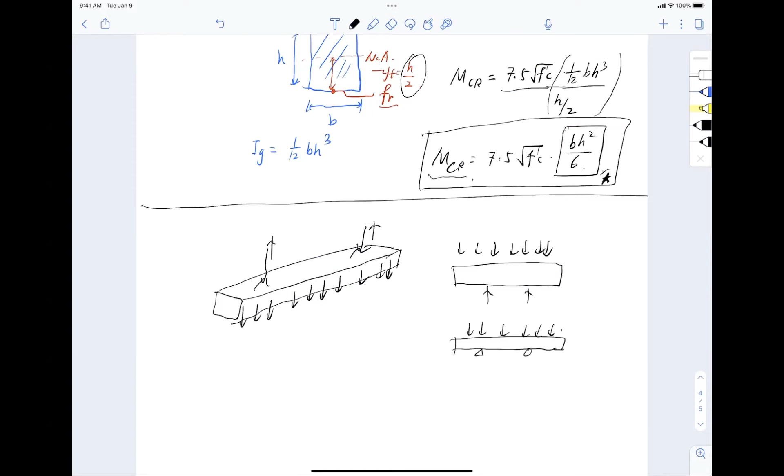But anyway, so that looks like this. Say the distance between the hooks is L. That is my span length actually. And the dead load of my beam is, say, omega. Okay. For a distributed load, simply supported, what would be the max moment in the middle?

Nick's favorite? Just kidding. What is it? 1/8 omega L squared, isn't it? Nil for Nick, 1 for Bob. Come on, remember this, okay? I'm just joking. Go back to see your mechanics material, at least the structural analysis part of it, to get ahead for this class, okay? Don't memorize, just basics. So that is the moment, isn't it?

So now, that is the maximum bending moment of me cranking up a beam, right? I don't get to say how much lifting power I have. That's my company. If it's cheap, low capacity; rich, big capacity. I don't get to say how long my beam has to be. That's the contractor, whoever made the beam, precast, it's too late. I'm just a lowly guy trying to lift it up. But if I want to make big bucks, the only thing I can do is control the distance between my hooks, that is, control the span length.

How do I control it? I have this equation right here. So I say the length squared has to be smaller. Let me set it this way so you see it clearly. This will be the cracking moment as control. It cannot exceed my cracking moment, right? So this has to be bigger than this. Is that right?

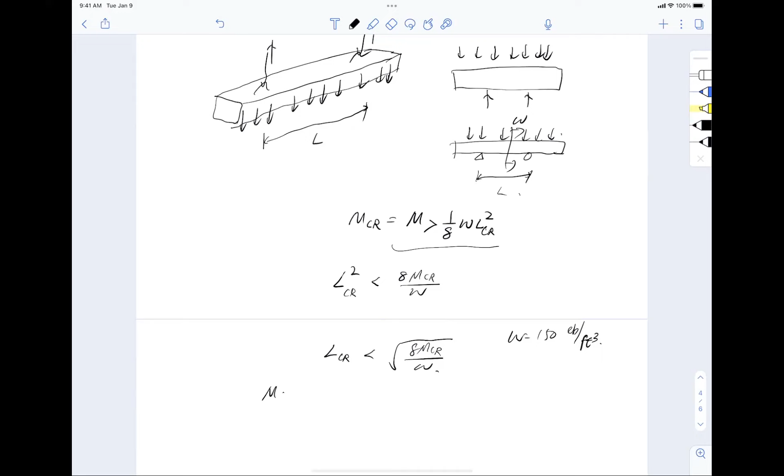So what I'm trying to say here, cracking moment is the first threshold. You have a beam, you have a structure, you don't want it to crack. So that is how we calculate cracking moment, MCR. Remind you again, two equations, this one or this one, whichever you want to use. For simplicity, I'm just going to write fr Ig over yt, which is half h for this case. So that is the cracking moment.

Okay, let's do some calculations. Example: I'm having a beam like this on site, and my section has a width b equal to 12 inches. And again, this is Bob's favorite. You see 1 foot by 2 feet high beams all the time. I know it's small, but that's how Bob likes it because it's simple for calculation. So a 1 foot wide and 2 feet tall beam. I want you to find the cracking moment for this beam if my concrete compressive strength is 4,000 psi, normal weight concrete.

So that is the example. Where do we start? I don't know, Bob, you put the hooks in? Wake up, we're not there anymore. Just trying to calculate the cracking moment, MCR. We start from this equation, fr Ig divided by half h. Remember this equation? So first I need to find the modulus of rupture, fr, equal to what?

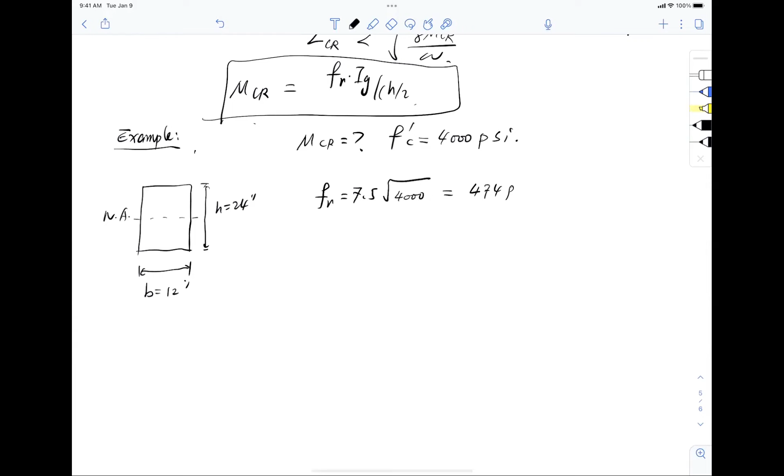7.5 lambda, which is 1.0 for normal weight concrete, times the square root of f'c. What is f'c here? 4,000. So punch some numbers out, please. Help me out, I'm bad at calculations. My algebra was like a D in college, and I'm not kidding you. 7.5 square root of 4,000 psi. What'd you get? fr equals 474 psi.

Now, for the exam, how do you know you got the right number? I want to make sure I'm right every step. How do I know? It's about 10% of my compressive strength. What is my compressive strength? 4,000. So it's about 400. So I'm okay, around that level. So I'm fine.

So I know I'm right. Got it? Quick check. Double check always, right? Makes things go easier. Okay. So now that is set.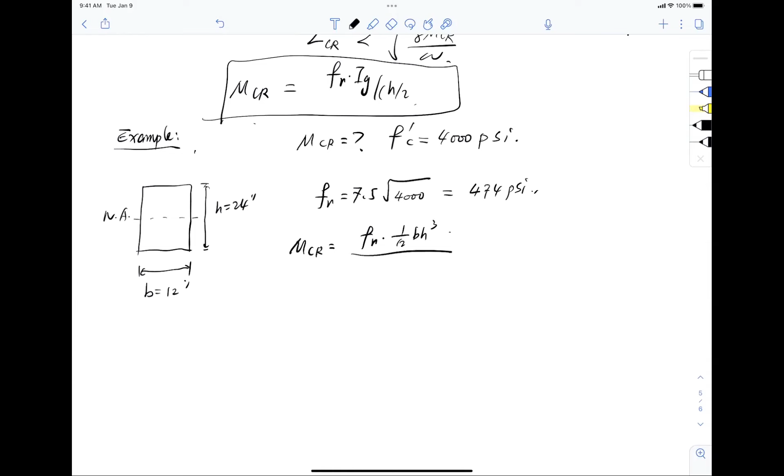So MCR equals fr times Ig over yt. In this sense, Ig is 1/12 b h cubed, divided by yt, half distance, so it's h divided by 2, right? So fr is 474 psi, times 1/12, b is 12 inches, height 24 inches to the power 3, divided by h/2. 24 inches divided by 2, so it's 12 inches here. So that is in the bottom.

So what do I have here, folks? Come on. What is it? 474 divided by 12, multiply 12, cancel it out. And there's a 12 here. There's got to be 12 to the 3, which is 12 cubed times 8. And there's a 12 again. So this is 12 squared. Let's do a competition, right? I'm doing it by hand, you're doing the calculator. See what you get. 474 psi multiply 144 multiply 8.

So what do you get, guys? 546,441. Do you get this or different? 42. Okay, close. Good. That's correct. Okay. And what's the unit? Where are you at, Miss? Think about it. Think about it.

I have psi here. And what is the unit for moment of inertia? Inch to the what? Power of 4, right? Why is that? b h cubed, right? So inch to the power of 4 for moment of inertia. So what is the unit for height? Inch. So what do I get? Inch to the 3, right? So after all this, I get inch to the 3.

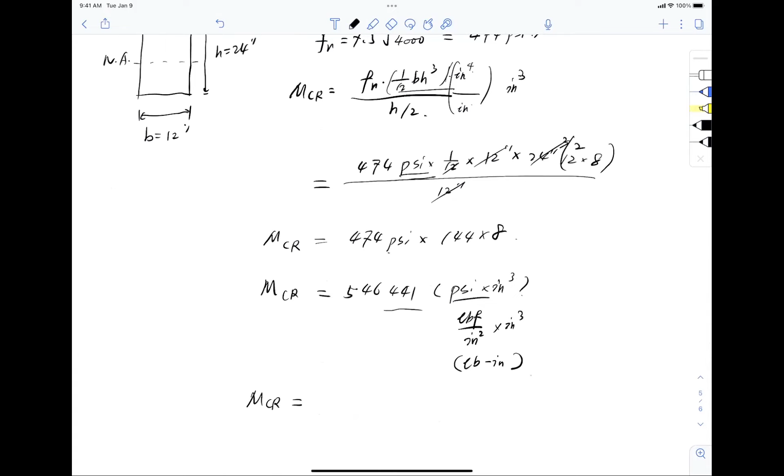So psi multiply inch to the 3, right? What is psi? Pound per what? Square inch, right? And multiply inch to the 3. What do I get? Pound inch. There you go. So MCR is 546,441 pound inch. And now convert that to kips, 1,000 pounds. What do I get?

546.441 kip inch. Is that awkward? Yes, it's awkward. Why? I don't like kips together with inch. I like kips with foot. So convert to foot: MCR is 546.441 divided by 12, kip foot. Folks, what do we have? 45.54 kip foot. That is my final number on the cracking moment. So if your moment exceeds that level, you're going to see an irreversible crack in your beam. Your beam is going to be gone. So that's how we determine the cracking moment.

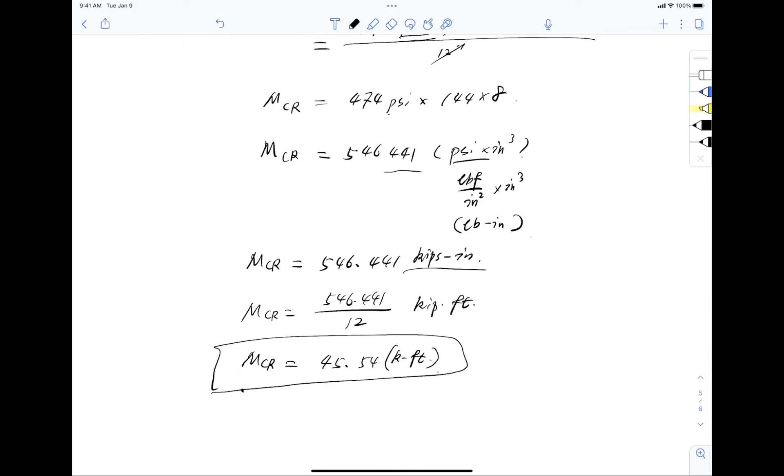Quick thing here. From this moment on, ladies and gentlemen, I say this once for all, we will only use kip foot as the unit for bending moment for design. If you show me pound inch, with a number like 4 million, 5 million, I am gonna go bananas and give you 0 points on exams and homeworks, okay? I swear I would do that. Why? Because on job site, you will not use pound inch for a moment. Too big a number. So always convert it to kip foot. Please help me to help you. Kip foot, kip foot. All right, so that is about cracking moment.

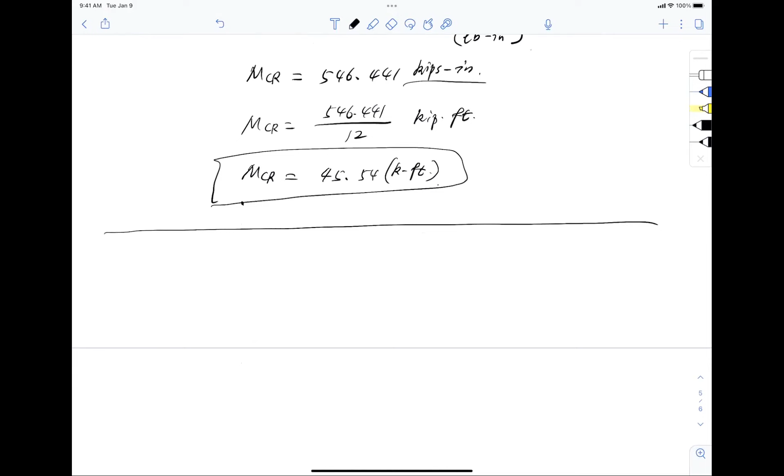Okay, I still got like 7 minutes. So I'm gonna start talking about compression zone a little bit. But before that, any questions? Are we okay? Not too bad, 7 minutes, all right? Just sip of water, pretending you don't see me. You're fine, right? Okay, 7 minutes.

So now we know a concrete beam sitting there alone or when lifting up will crack, isn't it? It's bad. So we have to put reinforcement in it. What's so big deal about it, right? So we have a beam laying down here and let's put some steel in it, blue indicating steel, one steel bar like this, one steel bar like that. So once I put steel in it, I start to bend it. Apply bending moment.

And remember mechanics of materials? No, I don't. That's okay, I'll draw you a picture. So one theory you should remember from mechanics of materials is that plane sections remain plane in bending. Let me say this again, even slower. Plane sections remain plane in bending. What does it mean? It means that think of your beam like a loaf of bread.

Think of your beam like a loaf of bread. What does a loaf of bread look like? Slices like this, slice like this, slice like this. Okay. Now, when I bend it, from side view, it looks like this: these slices together, chained together.

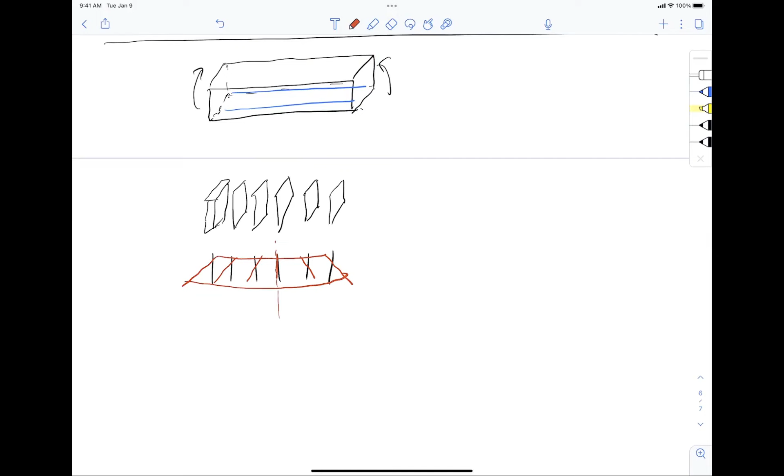So this loaf of bread will bend like this. This slice will bend a little bit more, the next slice a little more, and so on. So you connect the line and that gives you the bent beam. Do you see that? That is called plane section remains plane. So curvature is caused by linear rotation of the planes of these cross sections.

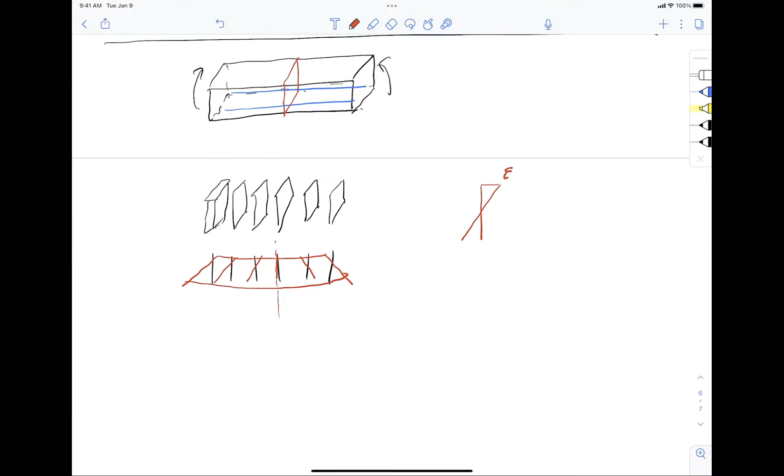Knowing that, what's really happening at bending is that, say I have a maximum moment in the middle section, a lot of bending going on. That means I will have a compressive strain on the top, and when it fails, it's going to reach the maximum strain in the concrete. And what is the maximum strain in the concrete? Well, you drew me the curve before, so let me go back to see.

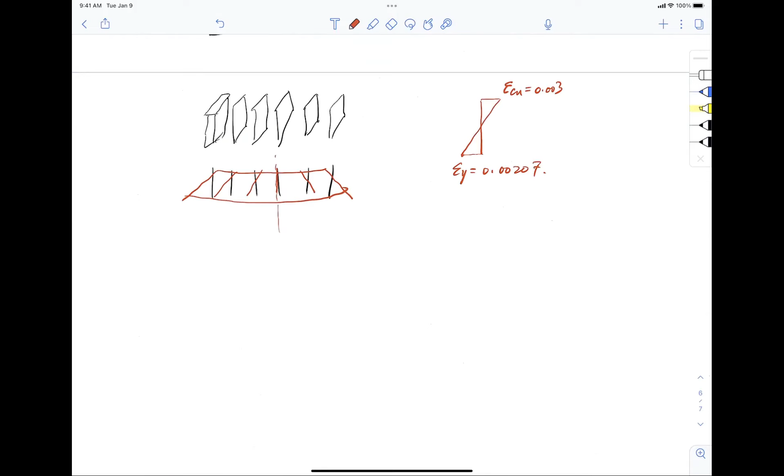When concrete is under compression, it fails at what? Epsilon cu, isn't it? And for epsilon cu, the number is 0.003. So if I bend my beam and the top fiber crushes at 0.003, my beam will fail, because concrete crumbles, and that's it. Now, for the bottom steel, when it yields, it will reach the critical strain at yielding, which is 0.00207 for grade 60.

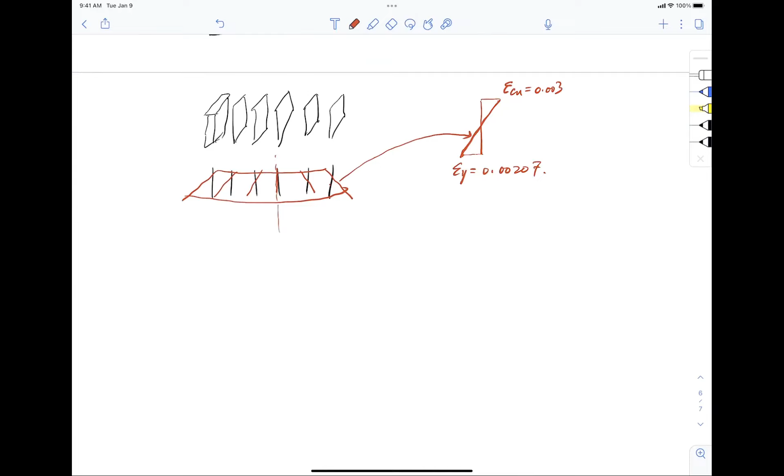And trust me, I will not bother you with heavy mathematics, but one thing you should think of: although strain is linearly distributed, stress is not. Why? Because the stress-strain relationship for concrete is not linear. It's curved, isn't it? You don't have to calculate it, but you should know that although the strain distribution is nice and linear, the stress distribution is not.

This is what the stress distribution looks like. In the top, you see a lot of compressive stress for concrete. And since concrete has no tensile strength at all, we assume whatever tension in the concrete is gone. Meaning below the neutral axis, no concrete anymore because it's cracked. The only thing left is steel reinforcement, giving you the yield strength of Fy. So this is the stress distribution, and this is the strain distribution in the diagram.

We'll talk about this again next lecture. If you draw this in the exam, no question asked, I will give you 20%. If I see this strain and stress distribution diagram, I'll give you 20%. How nice am I, right? Trust me, you will forget this. So I'm telling you again, if you just draw this, it will help you. You draw this, 20%. You don't draw this, you lose 20%. Freebie, take them.

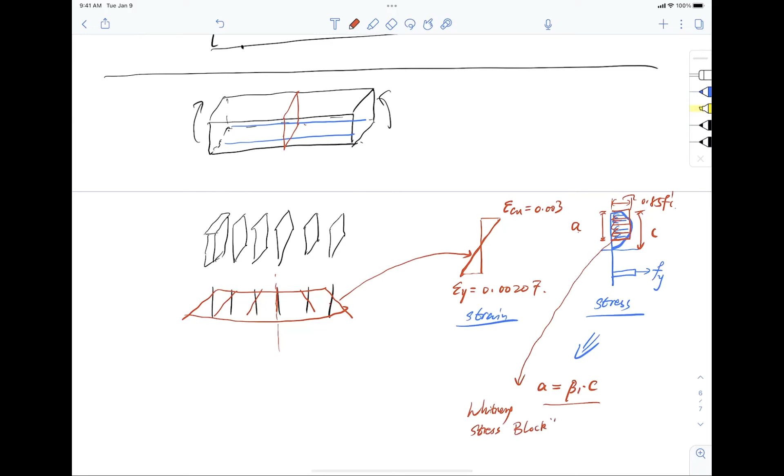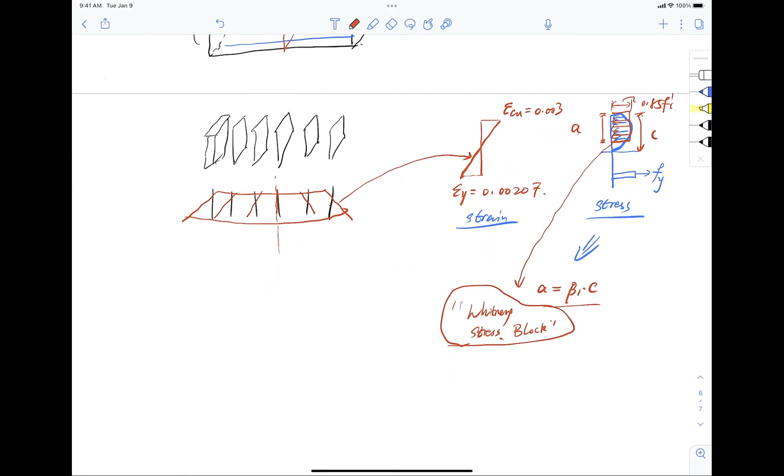So going from a crazy parabolic line into a simple rectangular shape, we call this our savior—the Whitney stress block. You say, Bob, you just turned a complex line into a rectangular, what's so great about it? I can do that. What's so great about it is this.

If I get this compression zone into a block, then the total compression force from this block equals the area of this block, and that equals 0.85 F prime C times A. Is that right? And remember, this is a beam, which means it has a third dimension—it has a width of B. So this essentially is A times B, and that, ladies and gentlemen, is the total compression of the concrete. No parabolic, no finding the centroid, nothing, because it's rectangular.

The centroid is the middle of it. So simple, so beautiful, right? And guess what, it's even more beautiful because in the bending beam, you have compression, and naturally you have to have a tension to equal that, to balance it. Tension has to equal the compression when you do a cut. Remember, in next class, when you do a cross-section cut, total compression has to be balanced by the tension.

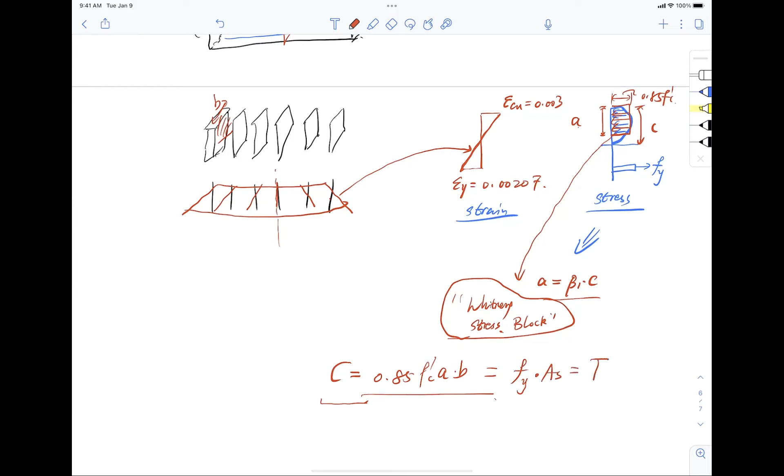So what is the tension? Steel, right? And what is the strength of steel at failure? F y, because it yielded. And if I know the area of steel that I put in, that is A sub s. And guess what—you just reach the balance between compression and tension.

Last question: do you know how much steel you put in a beam? You better, since you actually designed it. So you know A sub s. Do you know the yield strength of the reinforcement steel you put in? You better, because you told the guys it's grade 60 or grade 40. Whatever you put in, you need to know. So you actually know this part.

Do you know the concrete compressive strength? Sure, we test them, we know them—we actually order them already. So we also know F prime C. Now, do you know the width, the section size of the beam? Of course, I drew it yesterday, I know it. So you also know B.

The only thing that needs to be determined, genius Whitney says, is just the effective compression zone A, isn't it? And it so happens that A just equals Fy times As, divided by 0.85 F prime C times B.

Now what does it mean? It means that when you design a beam, you can estimate the effective compression zone of concrete. You say, why do I need to know that? Because if you know the compression zone, you know the centroid of the compression force. You know the location of the bars, you know the distance between the centroid of compression and the centroid of tension. Then the moment resistance equals compression multiplied by the distance between compression and tension—you know the design capacity. So just like that, you should theoretically know how to do moment design for a beam.